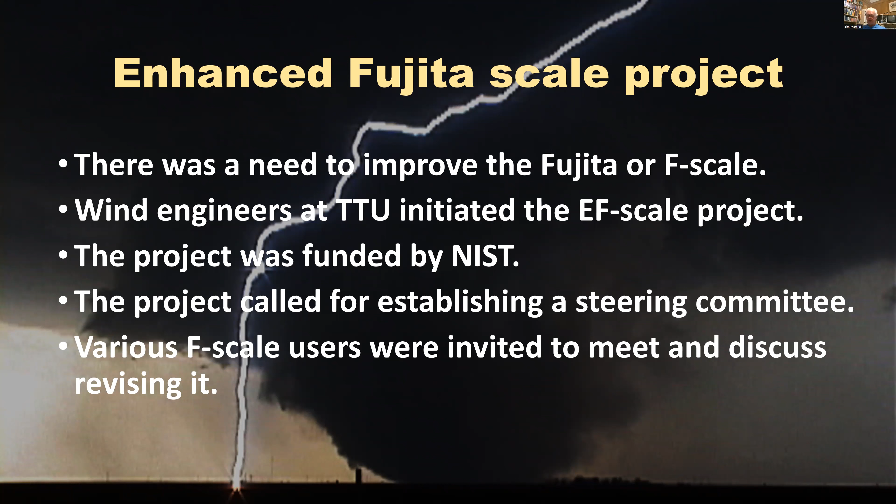The project was funded by NIST, which is still funding it in a way, and it called for establishing a steering committee, and various F scale users were invited to meet and discuss revising it. A meeting was held in 2001. I was there. 20 people attended.

A group developed what I call damage indicators, which are like house, barn, school — that's a damage indicator. And then degrees of damage associated with it: minor damage, major damage, it's gone, kind of thing. The group agreed to preserve the historical database by keeping the enhanced Fujita scale to the 6 numbers, 0 to 5. Then 6 experts were selected out of the 20 to develop the wind speed ranges, and I was one of the 6.

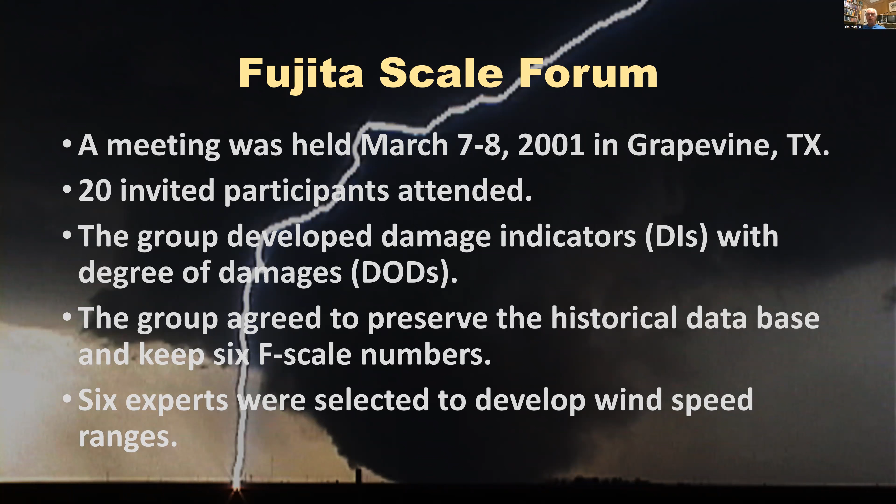So usually what we're talking about in terms of wind speeds, it's a 3-second gust at 10 meters above the ground. And 10 meters is chosen because the standard anemometer height is 10 meters. So we established a range of failure wind speeds through what's called expert elicitation — it's based on our knowledge of buildings, how they are constructed, and how they fail. And then the document was issued.

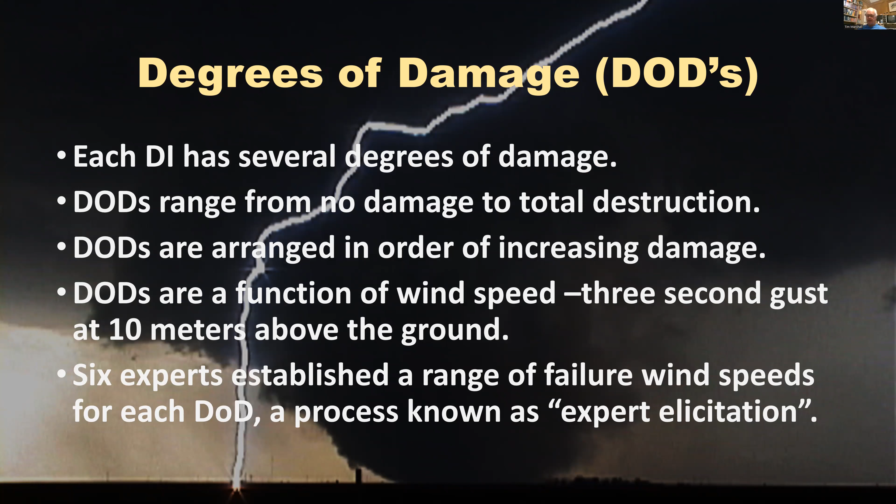So you've seen this if you've Googled that and downloaded this document. The most common DI, of course, is residence. So here we are with the residence. It has a degree of damages from 1 to 10, 10 being the most destructive. We have 3 columns here: EXP, which is the expected wind or failure wind, and LB, which is a lower bound.

If there's some sort of fatal flaw in the building that causes it to collapse. And then we have UB, which is upper bound.

And so you get to choose either column, or somewhere in between if you like, on what you think for this. So if you're missing a few shingles on the roof, it's expected to be about 65 miles an hour. If you're doing more damage than that, with gutters, awnings, vinyl, metal siding, 20% or less of the roof, it's 79 miles an hour.

And if you're dealing with uplift of the roof or a partial uplift, it's 97 miles an hour. We do have 5 in here, which is a house shifts off its foundation, and that's because of so many problems with anchoring that we see, especially in the southeast. And then all the way up to 200, where it means that a well-constructed residence is gone.

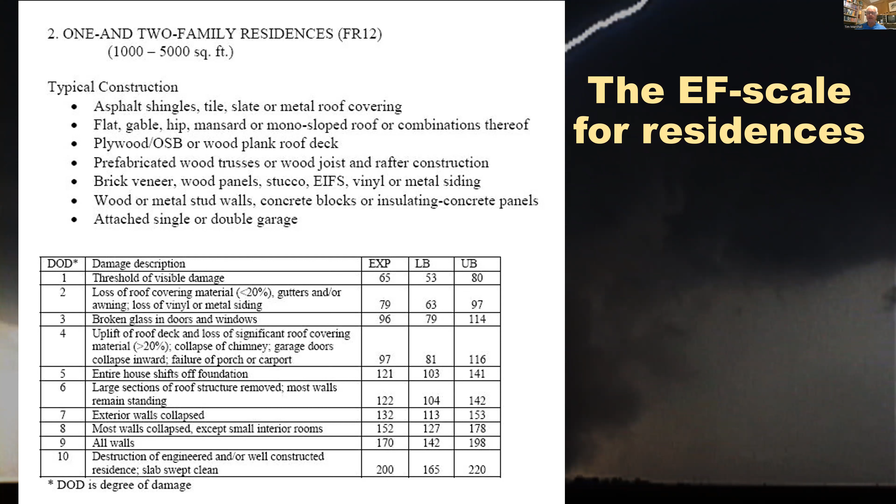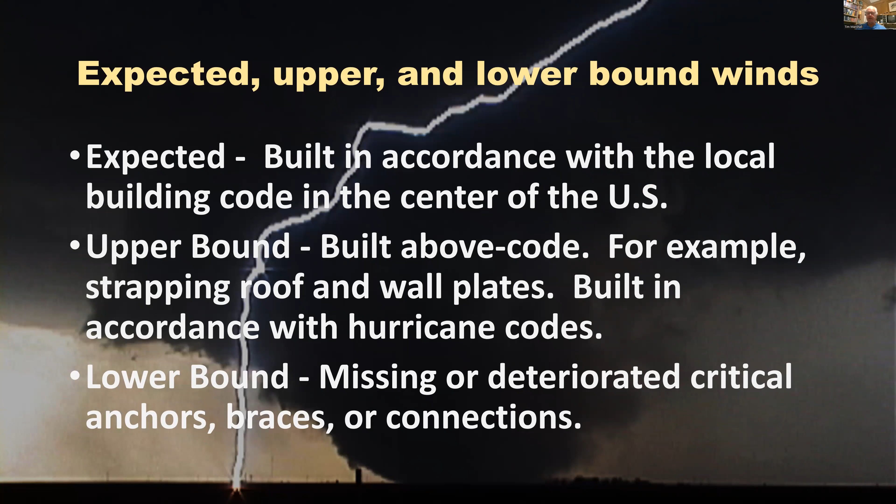So this is just a little bit of an explanation of all 3: expected, upper bound, and lower bound. And then if you want to compare what the old F scale was with this EF scale, you can see that in the lower bounds, not too much of a difference, but in the upper bound, the wind speeds are far less than in the old Fujita scale.

And although they're a little different in terms of their baseline, the Fujita scale was based off of fastest 1/4 mile. This is a 3-second gust speed here for the EF. But you can see the wind speed ranges: F5, 261 to 318, which is a 3-second gust of 262 to 317, so not much of a difference.

But the new scale knocks down the wind speed considerably for EF5. Now why? Well, it's been our experience you don't need a 300-mile-an-hour wind to knock down a house. Houses are built to a minimum code, and you've all taken tests, right?

You've all taken exams. Do you study the night before to get the minimum? Probably not, but you hope to make it and pass. But unfortunately, that's not the way it is in the building community. Their goal is the minimum because of economics.

If you build a house too strong, you're throwing money away. So you want to build just what the code wants. And of course, the odds of getting that, if that's your focal point, you're going to be below that, right?

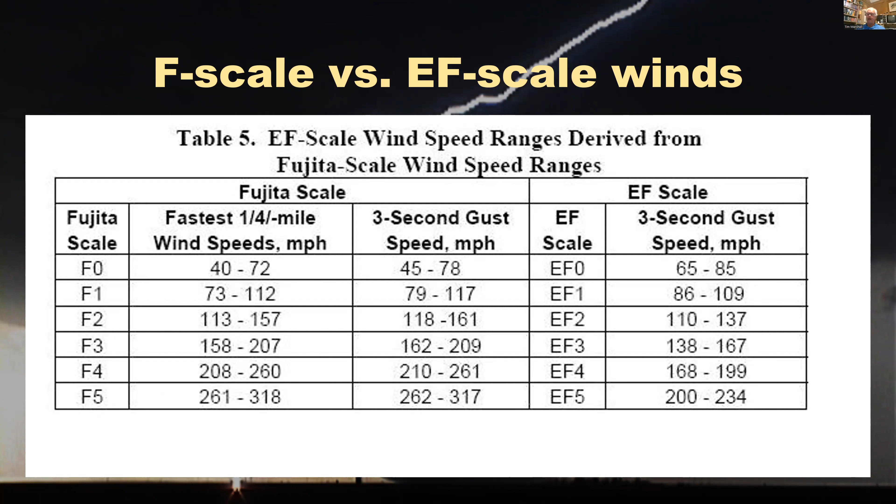But in the building community, it's just not happening. So if their house is geared for 70, that's what they want. But unfortunately, because of workmanship and problems with not understanding connections, their houses fail at a lot lower wind speeds. And even 200 in most instances is way too high for a wind speed to knock down a house. Houses can be knocked down at much lower wind speeds, and we'll go into a little bit of that here in a moment.

So this is a subjective scale, okay? We know that because different people can look at this and go out and evaluate it, and somebody comes up with an EF2, somebody comes up with EF3. There's going to be a difference here. We know that. But we're using the concept of wind speed damage correlation.

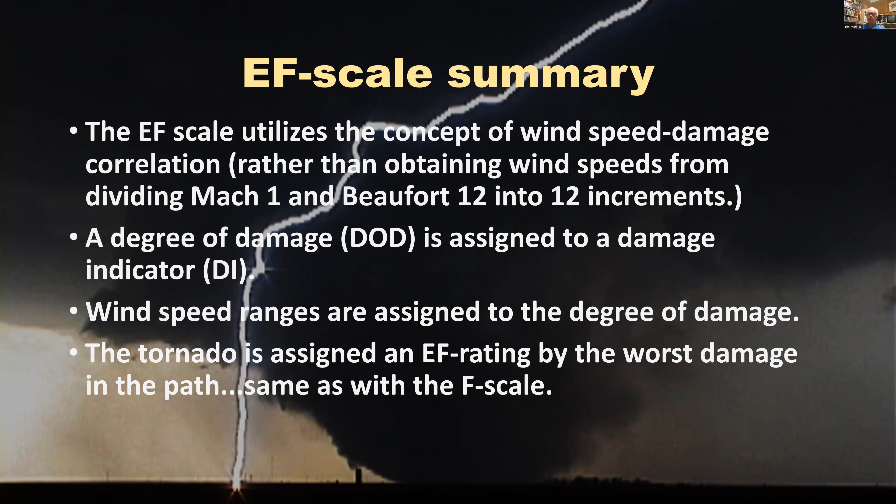And the old F scale was based off of 12 increments between Mach 1 and Beaufort 12. That's how Fujita just connected the line, divided it in 12 for empirical reasons, and there you go. So what we want to do is go out there, look at critical connections, and estimate basically what wind speed it took to knock the building down or do the damage to the building. So it is subjective. Errors can be substantial, especially if people don't know what to recognize. What is a fatal flaw of a building?

And it's certainly going to be much more complicated. The original EF scale document was like 70 to 90 pages. The new EF scale document I'm working on now, that'll be out hopefully in 2025 or 26, will be 500 pages.

Okay, it's going to be huge. And it's going to be complex, and it's going to be up to the National Weather Service to adopt it and then have training materials to train their people on how to evaluate damage, because they're the ones that are going to use this a lot.

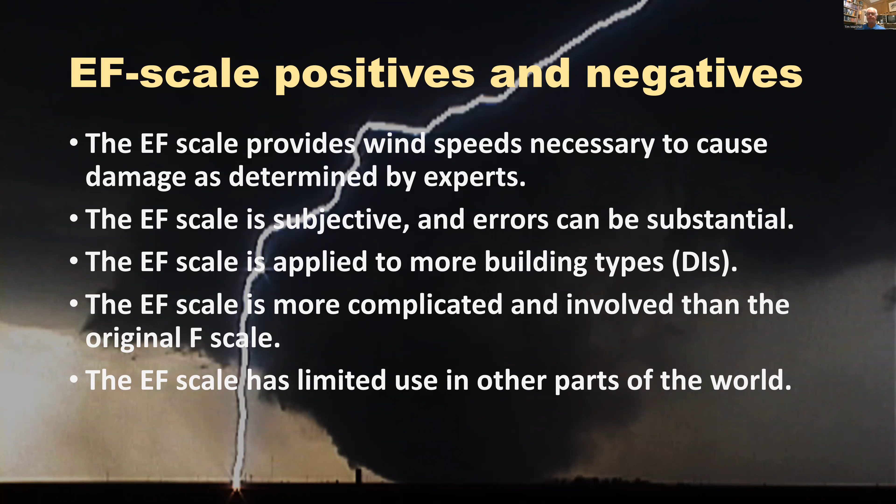So how do we address the fatal flaws? How are we going to recognize that? That's a big key here. And then what happens if a tornado doesn't hit anything? What happens if it's out in the open country?

Well, we are going to add irrigation systems to the new EF scale because we've gotten a lot of research on that. But there's still questions about vegetation and whether the road pavement has been scoured. How do we come up with a wind speed for that? We're not going to be able to do that on this iteration.

In the meantime, other countries haven't waited for us, and they've started to do their own thing. Canada has their own EF scale. So does Japan. In Europe, they have their own F scale. And in the UK, they use a Torro scale. So the international community has gone ahead and come up with their own ways of doing things.

Well, hopefully we can try to work things out so that we can all get together on one page here. And this is a work in progress. We know there's going to be other things that are going to happen in the future. And we're going to have meetings in the future, although I'm going to end my tenure once I am done with this project. It's going to be up to some other person to deal with it. Maybe one of you can take it over.

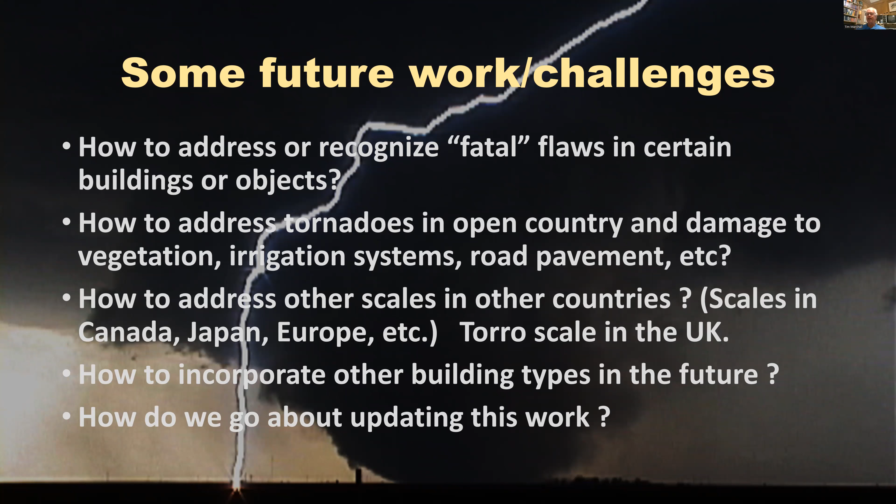It's going to be a job to continue with the EF scale. So in 2015, the ASCE, American Society of Civil Engineers Development Committee, I was asked once again to become part of this. And I said yes.

And I didn't think it was going to be that much. I thought, okay, we do a little bit of tweaking here and we're done. And then mission creep set in, and they asked me to write a commentary, to add photos, to do research on incorporating other damage indicators into the new enhanced Fujita scale, if you will. So that turned out to be a much bigger project.

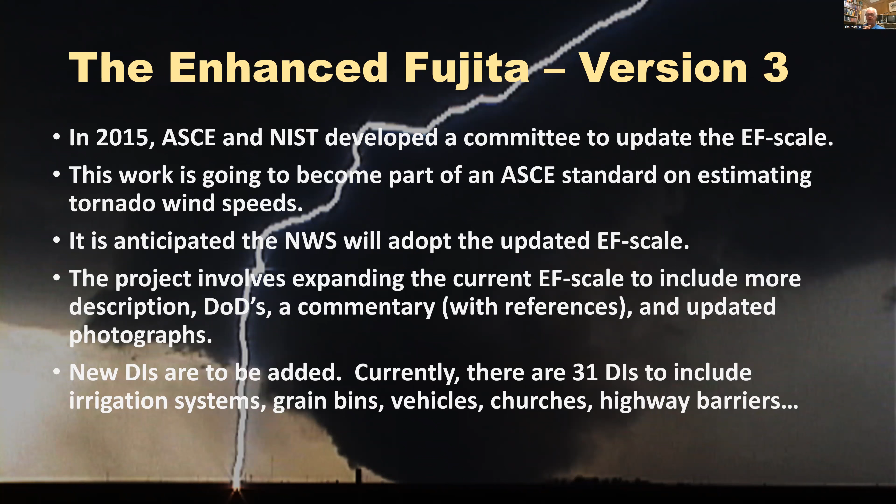Also, we're going to add irrigation systems, grain bins, vehicles, churches, and the like. And the draft, this is as of 2021. Obviously, time is of the essence here, and we're moving along. Years fly by, as you know.

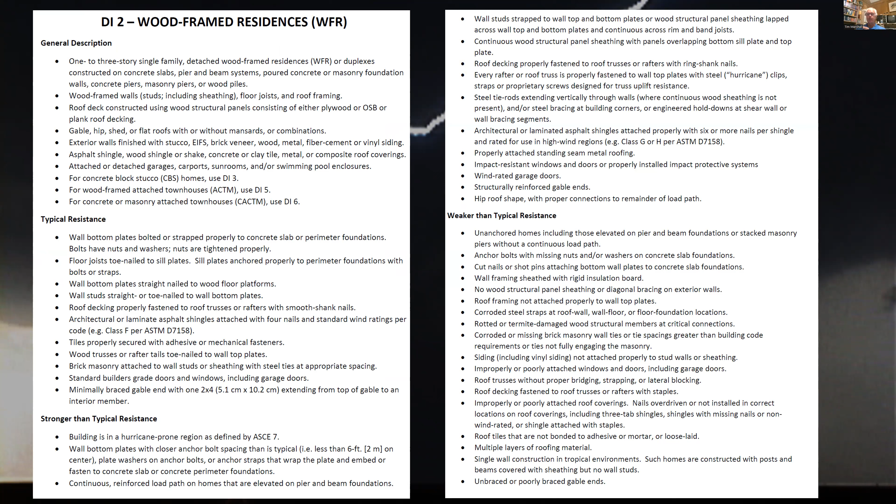But if you compare what the old EF scale, we call it the old EF scale, is with the new one, yeah, we have a lot more bullet points in the new one here. This is for residences. And we have a much more detailed table on how to use this, similar to the old table I showed you a few minutes ago, but here much more detail in it.

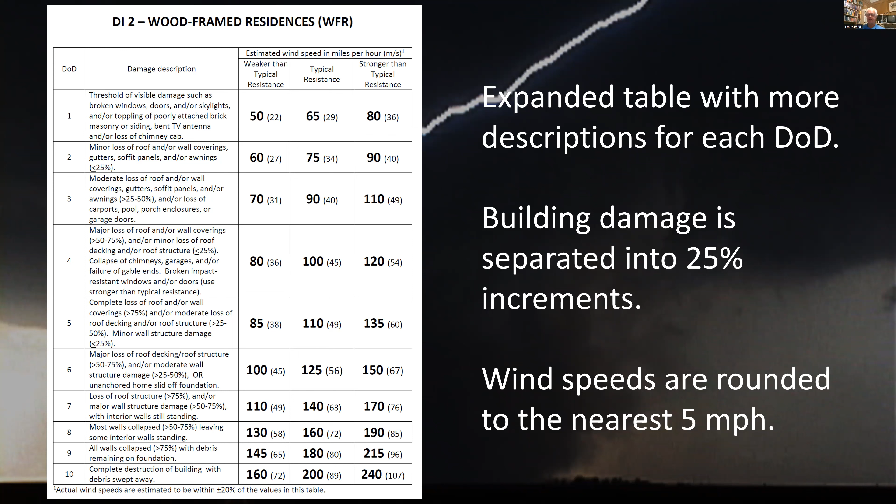The wind speeds are pretty much the same. In this case, we have a lower resistance column on the left, and then the middle one is the expected one. And then the one on the right is higher yet, for the upper bound.

And then there's a commentary, which is brand new. I wrote these commentaries for the most part, and added my photos in there for the damage surveys I've done. I've done over 100 tornado and hurricane damage surveys. So I have thousands and thousands and thousands of photos, and therefore you're going to see a lot of it.

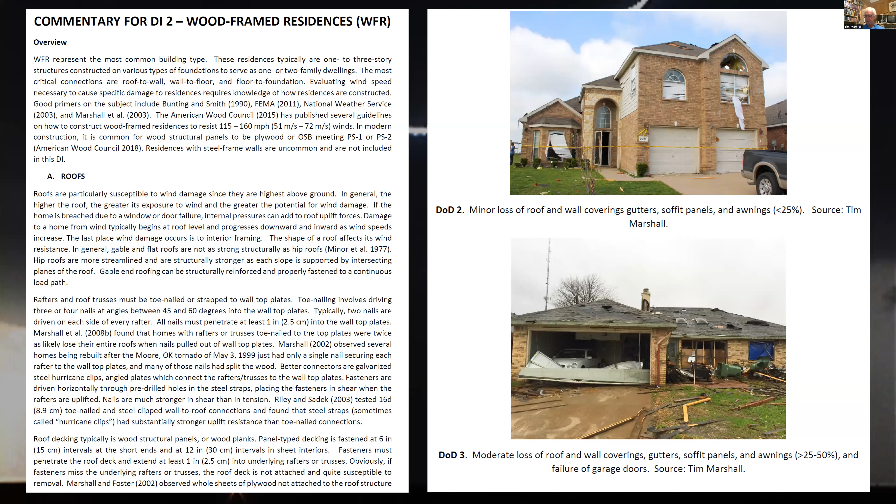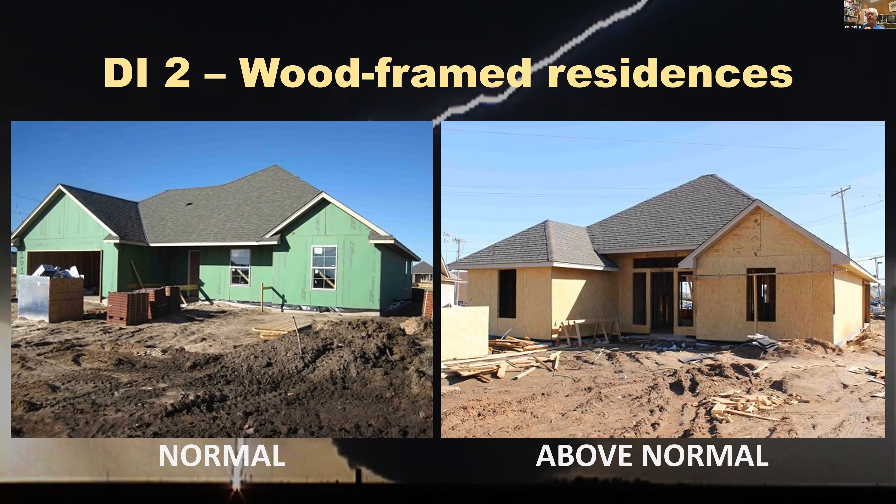Now, you're not going to know that if it's covered up by brick. They'd both look the same, but yet the one on the right would be a stronger house to wind.

Now, what is the code? We talked about the minimum code. In Western Illinois, the code currently is 115 for an ultimate, which is about a 90 mile per hour, 3-second gust. Well, 90 miles an hour doesn't sound like a whole lot, and it isn't. Some derechos have higher winds than that. 90 isn't really a very strong tornado, it's a fairly weak tornado. And 90 for a hurricane is a pretty low-end hurricane.

So that's the minimum, that's the code, that's what builders are going for. And obviously, if they're going to go for that as a target, they're going to miss it more often than not. So homes aren't going to be built very well. We know that.

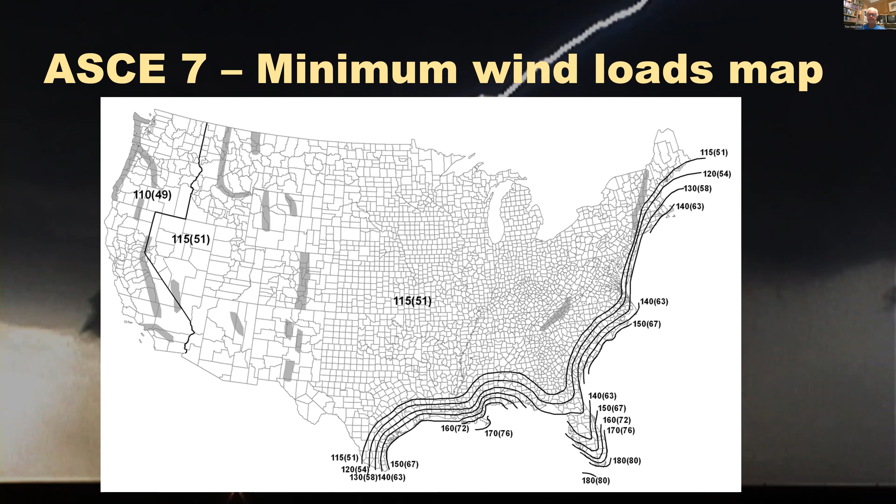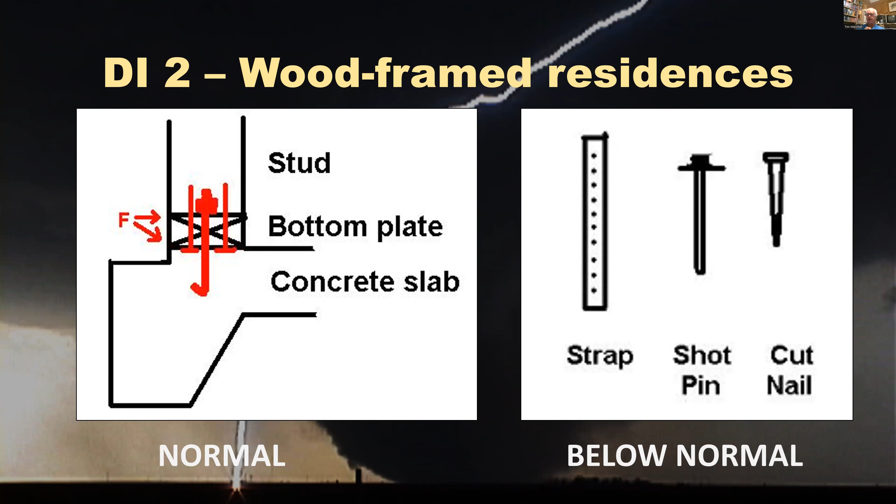And some municipalities allow a shot pin, where you just load a special gun and you go ahead and shoot, boom, down right through. Well, it's like a nail going through it, spalls off the concrete, doesn't really seat very well. But unfortunately, that's what's done.

So here we have on the left a normal connection, which is a stud that's toed to the bottom plate, with a shot pin and a square washer attaching it down to the concrete foundation. But on the right, we have an above-normal connection, which involves an actual steel tie that grabs the stud, and the fasteners are driven in horizontally so that now you're dealing with trying to shear the fastener instead of just pulling it out. Much stronger connection, see? Connections in shear are much stronger than a connection in tension.

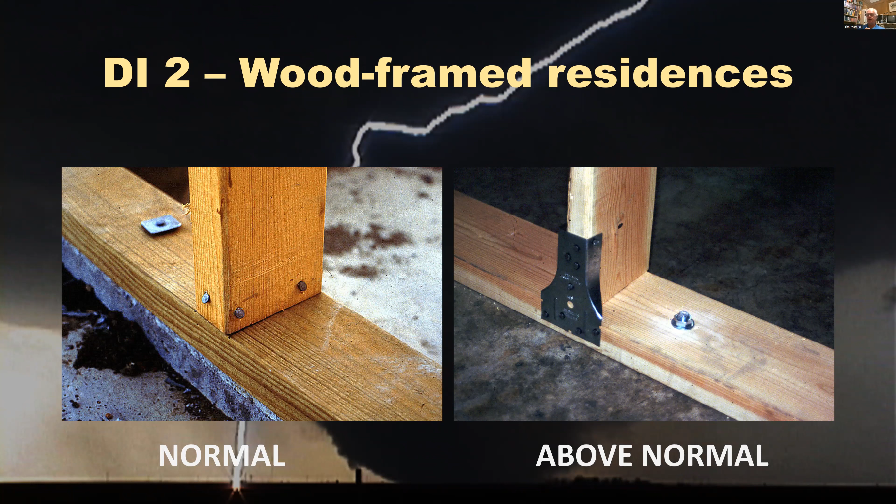And the same goes for the roof. Here on the left, a typical toe-nailed rafter into the wall top plate, and the top plate's doubled for the weight of the roof. But on the right, you've heard of the hurricane strap, metal straps that can be done, and again these are horizontal and screwed in. Screws are stronger than nails. You're trying to shear this connection, tear that plate, or pull out those fasteners from a shearing perspective, and it's a much, much stronger connection.

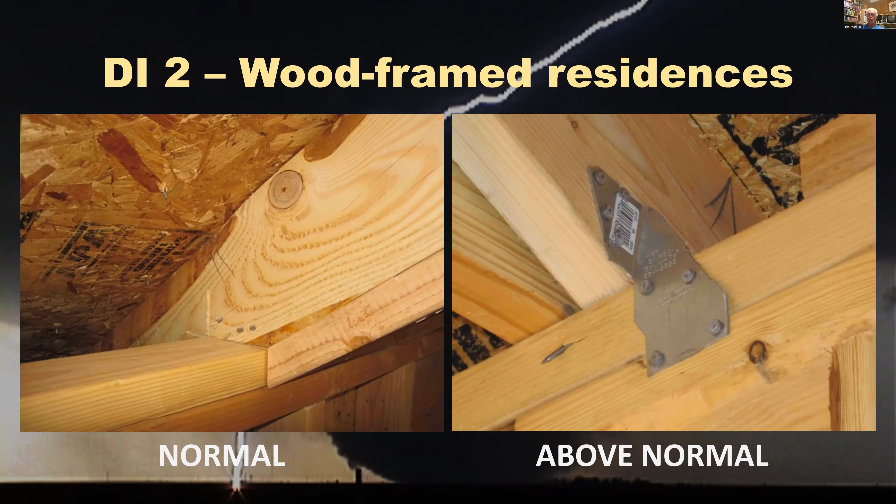So when you get to a house like this, trying to evaluate it using the old EF scale, we see that the roof is gone for the most part. If you scroll down, it says DOD 4: uplift of roof deck, loss of significant roof covering material greater than 20%. Collapse of the chimney—well, the chimney's still good, but that's okay. Garage doors—you can't see the garage here, but that's pretty close. It could be 4 or it could be 6. Large section of the roof structure removed, most walls remain standing. So maybe somewhere between 4 and 6 for an expected value.

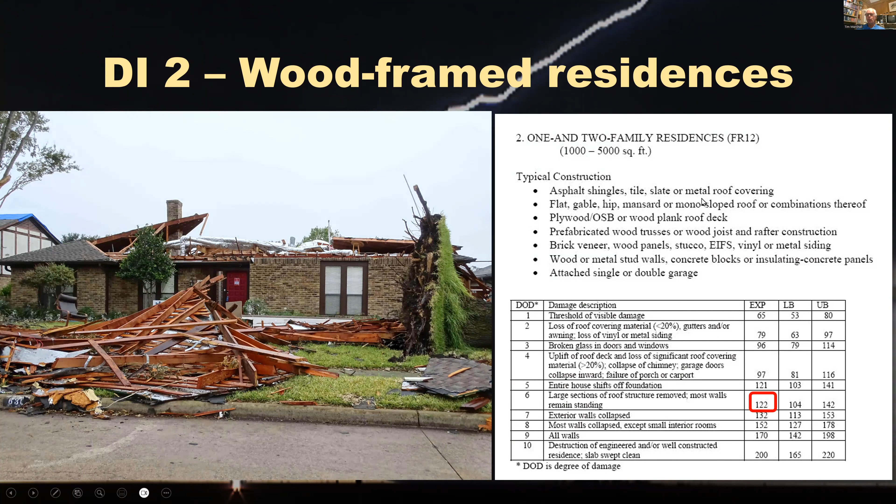And that's what we do. We go ahead and use that, somewhere between 4 and 6.

The next one here, we have much more severe damage—the house is completely collapsed. There's hardly a wall left standing, but we've noticed at the edge of the house that it was actually nailed. The wall plates were nailed in the low insets on the lower left and lower right. You see the little divot—if you've ever pulled up carpet from a floor, sometimes you have these little divots, and that's what this is here on the right, a divot in the concrete, just a clear cover coming off. Well, this is horrible construction. I don't know how anything like this passes in the city, but it does.

So in this case, where you'd have all walls down, number 9, you'd have to use a lower bound here, or the LB—that's the value you would use. It's not a well-built house. So recognizing the fatal flaw in a house could actually reduce its wind resistance, and that's what it does here. You can look around—there's trees around, there's other houses around. This house looked like it just got picked on. It just didn't take a lot of wind to knock this house down. And that's the problem with some of the old assessments, that they don't consider the construction. You have to look at the construction.

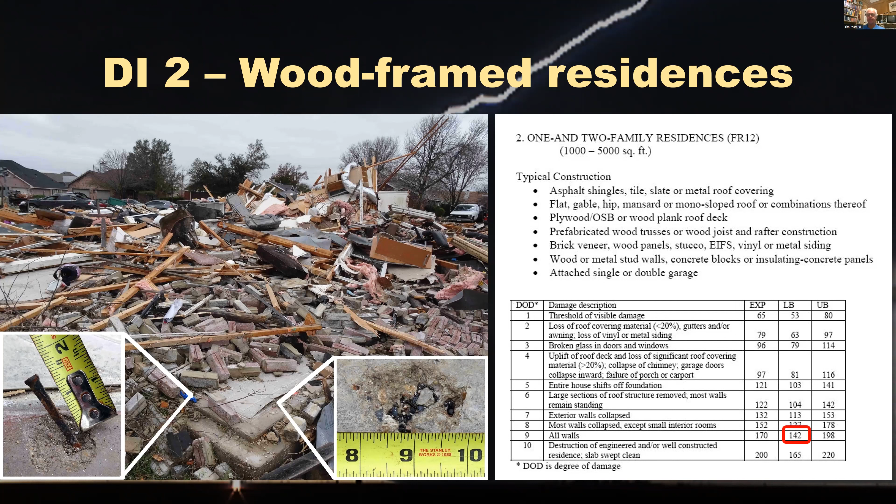And here's another slider here. Was this house anchored down? No, it was not anchored down. Look at the blocks it was set on. Now, unfortunately, there's a lot of houses in Illinois that are just sitting on blocks like this, and they're not anchored at all, so they will just slide right off. And that's why we have DOD 5 in here, entire house shifts off foundation, because that's for so many houses that we see. Sometimes a third of the houses we see are what we call sliders.

Now, I'm from Chicago. I used to eat White Castle hamburgers all the time. We used to call them sliders, but it's the same thing for houses here, without the onion, of course.

And so now you have this as being a real problem. Substandard construction is what this is. You see the roof is gone, so that could give you another point. You can say, okay, the roof is gone, so how was that attached, if at all?

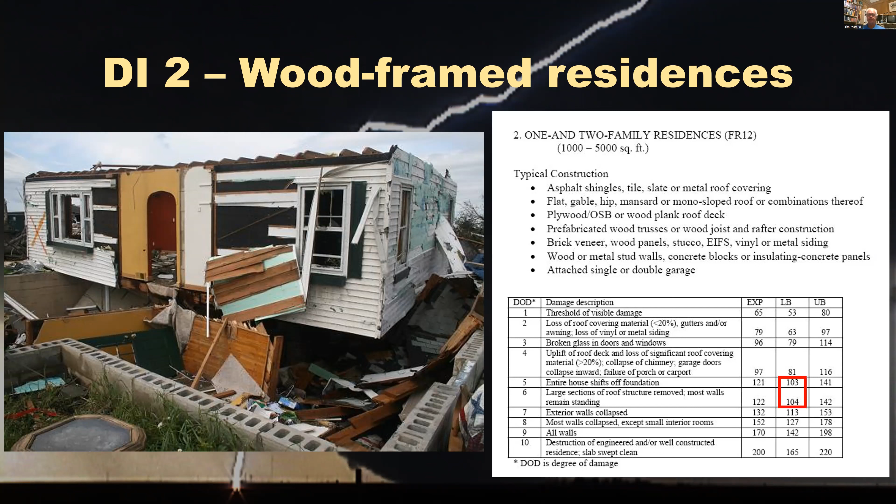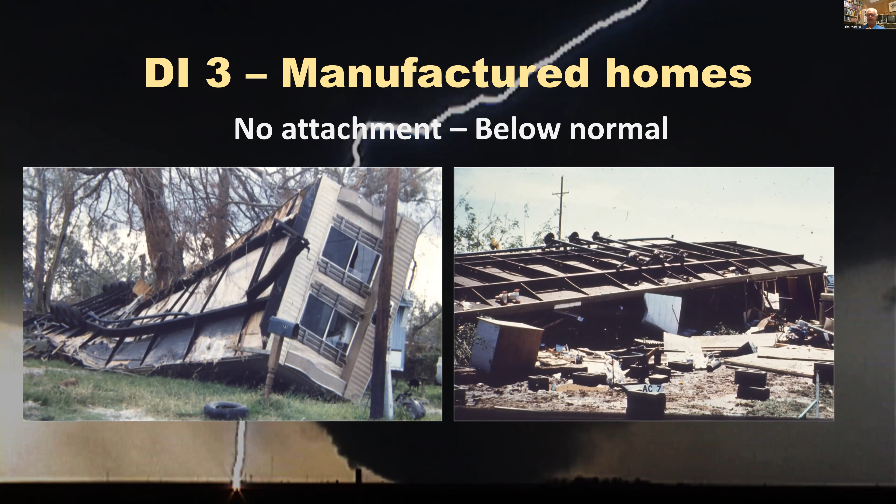And then manufactured homes—these are steel carriages or undercarriages that are really supporting a wood box. They are minimally anchored or sometimes not anchored at all. You've heard a lot about how these things roll and tumble at fairly low wind speeds. The one on the left, look at the mailbox—it's still there. The one on the right flipped over. The wheels had been removed prior to when they installed it, and then they're just sitting on blocks, that's all it was.

But again, where do we get the most of our tornadoes? Where do we get the most of the derechos? We get them here in the center of the country. They do have higher requirements in terms of anchoring for the coast because of hurricanes. So that's interesting, because somehow tornadoes and derechos are not a threat, but yet hurricanes are. That doesn't make any sense.

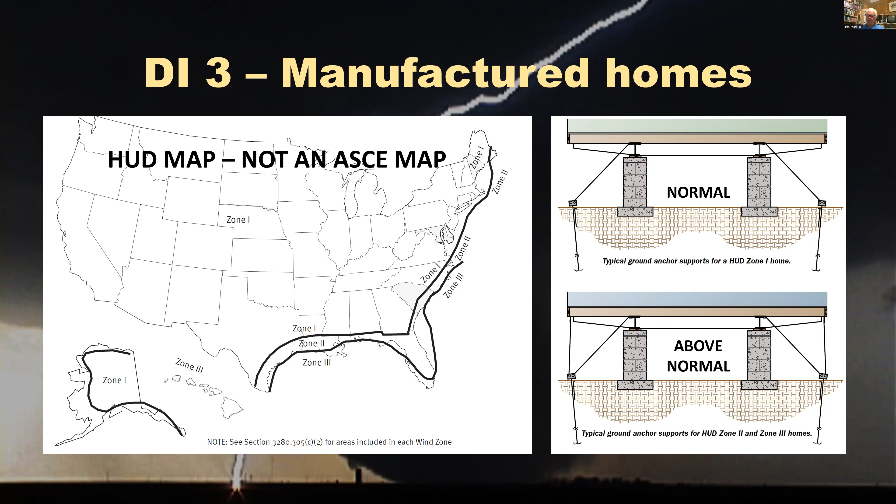But from a standpoint of what they think about in the code, it's like, well, the odds of getting hit with a tornado or a derecho are pretty small compared to getting hit with a hurricane. Well, that may be true, but if you're the person that got hit, you certainly would want something more than minimal attachments.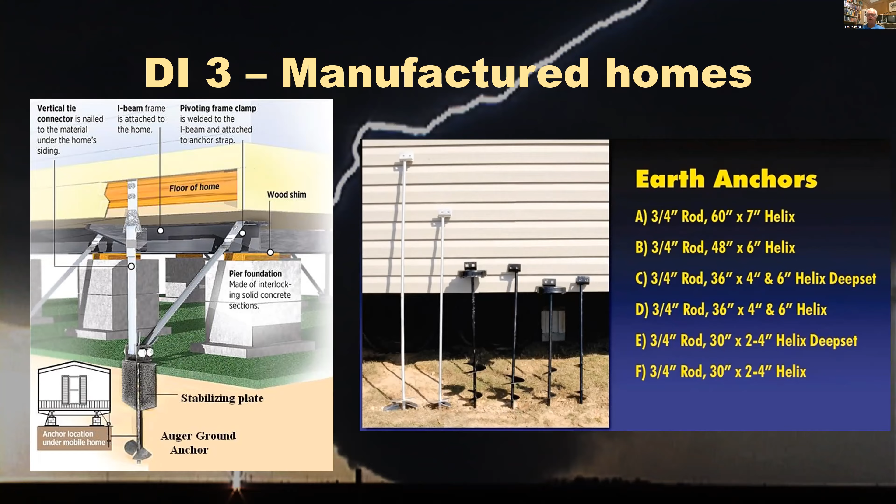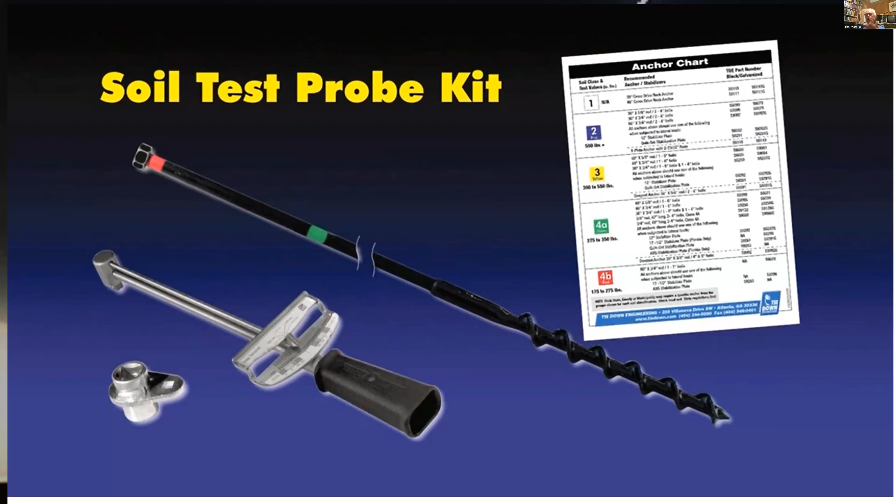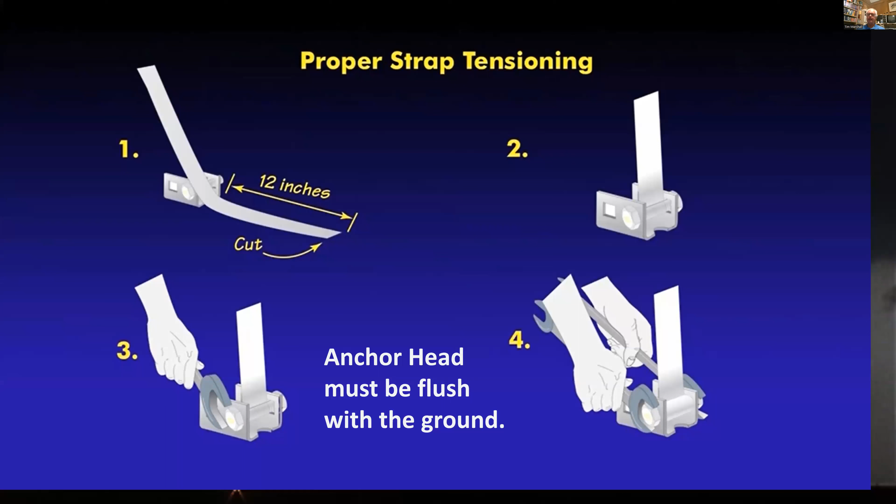Well, then you got to use a rock anchor, and it's a totally different anchor than it is for soil. It shows here how you're supposed to install the anchor. It goes down, you have a plate, so it bears up against the plate like so. And then you got to test for soil conditions, depending on how long your anchor is, in type 1, 2, 3, 4A or 4B soils. It shows you here how to attach and make that strap tight, and the buckle that goes around the I-beam underneath the home to make sure that's also attached.

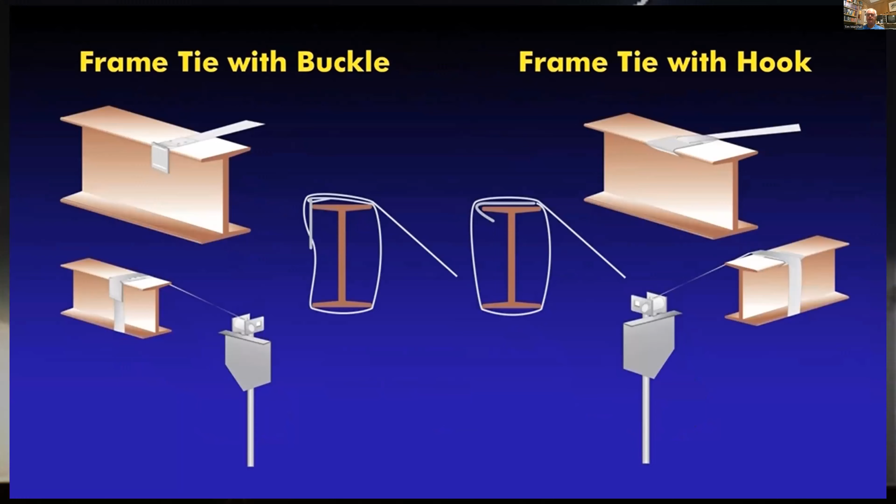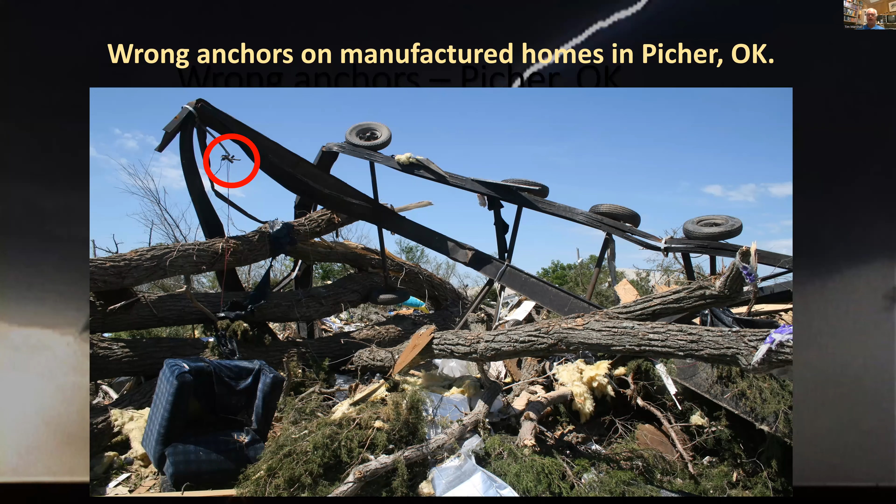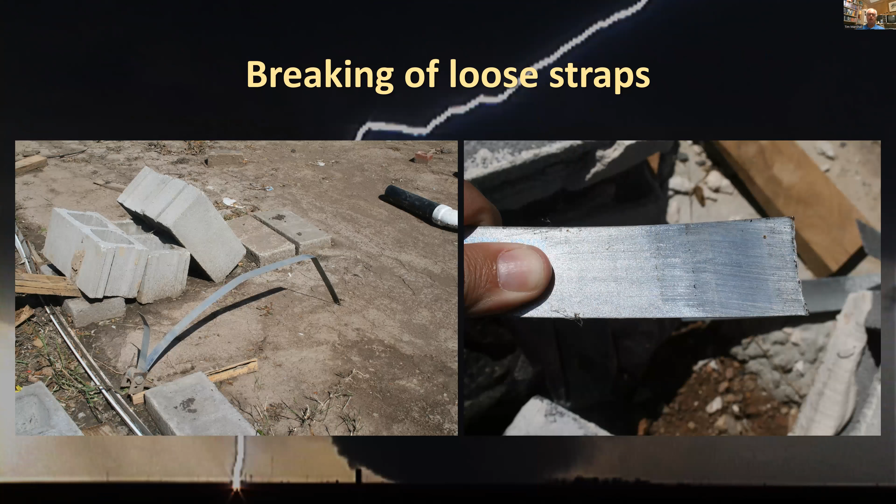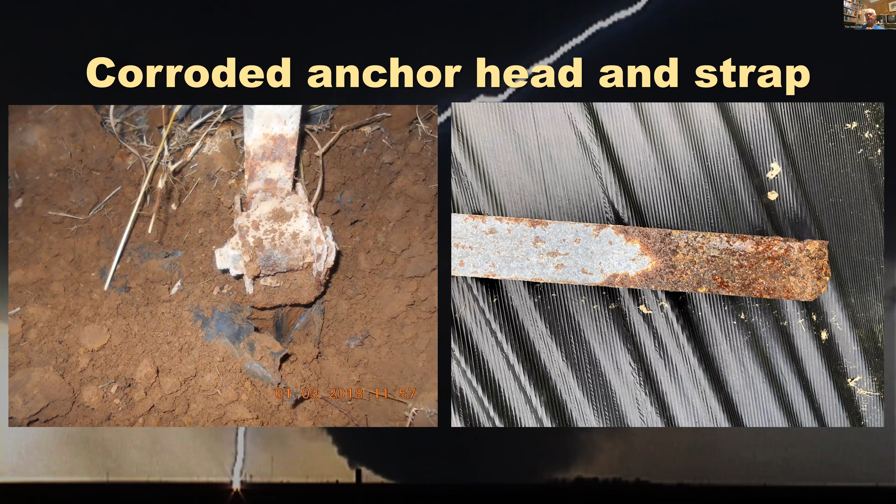And of course, it pulled right out. It didn't really anchor this home. One of the things that happens is when part of the house begins to come apart, the strap breaks. It's a real flimsy strap, and we can see that here. It's galvanized steel, but that doesn't mean it's not going to rust, and it typically will rust and eventually corrode away. I looked at a number of these in Florida, and they corrode away in 10 to 20 years.

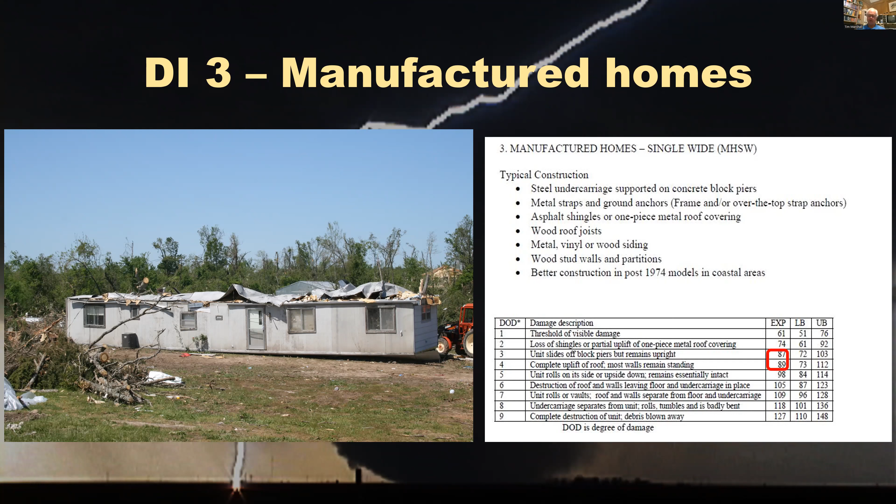So going back to the EF scale, looking at this, we see that this manufactured home has a steel undercarriage, but it's not on blocks. Well, it fell off the blocks. It also has some roof damage. So if you look down the degree of damage, you've got the unit slides off block piers but remains upright - that's DOD 3. DOD 4 is complete uplift of the roof, most walls remain standing. Well, it's been uplifted some, but not complete, so somewhere between 3 and 4 DOD. This is normal expected construction, what you would expect to be a failure wind speed there. So that's how we would apply the EF scale to manufactured homes.

Now, if you go out to one of these big box buildings like a Walmart, Kmart, Home Depot, Menards, whatever, a lot of times they're built of either concrete masonry units or a precast tilt-up wall. Tornadoes hit those and damage those pretty well, and we have to have a different DI for that because it's a totally different kind of building.

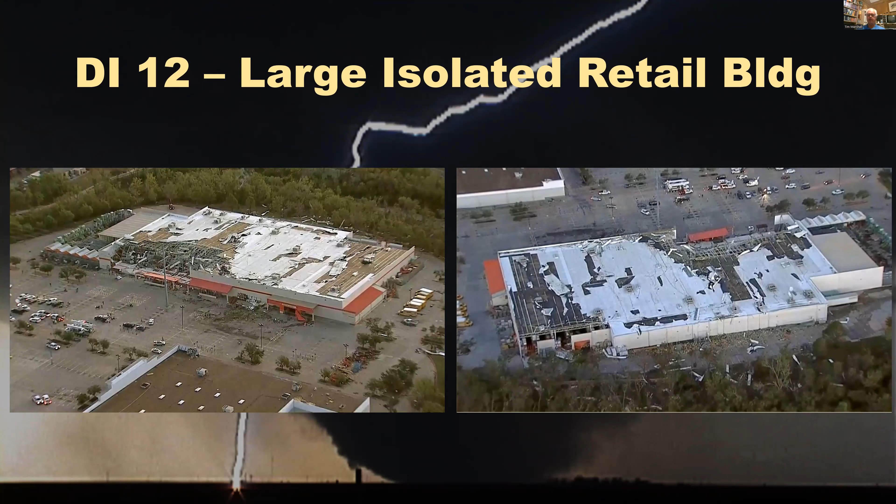And you can see the types of damages here. This was from Dallas, Texas. I looked at this Home Depot here. It had a few wall panels down. The front end of it buckled in where they had a weaker wall. You can see pretty extensive damage here. Here's a ground view of it.

Interestingly, things that are not damaged are just as important as things that are. Here we have a high tension line tower that wasn't damaged, but the building is damaged. So that's interesting.

Large isolated retail buildings, that's what we call it. If you look at the degree of damage, you can see uplift of some roof decking, significant loss of roofing material, long roof spans collapsing downward, uplift and removal of roof structure. We don't indicate percentages here, but we will in the new enhanced Fujita scale. So somewhere between expected wind speeds of 103, which is DOD 3, and DOD 5, which is 134. But we also know these towers for electrical transmission are designed for 120, so we figure that stayed, it's probably a little less than 120, somewhere between 103 and 120.

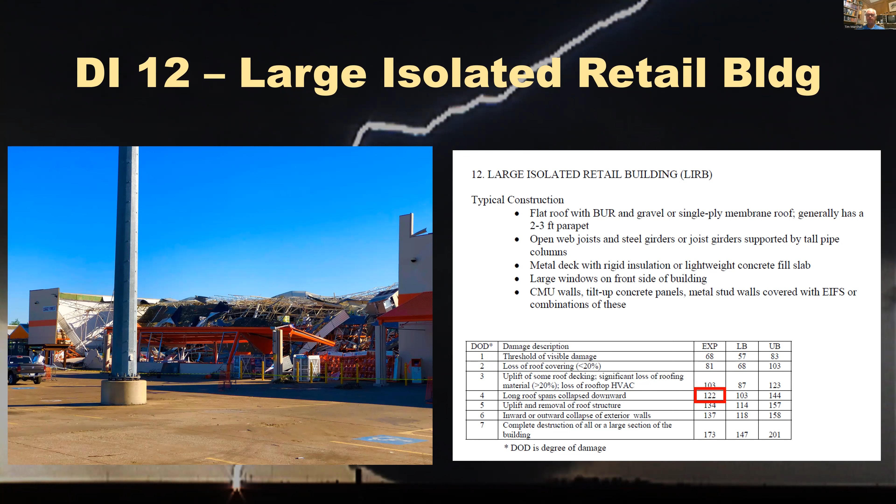Now we're looking at a large isolated retail building in Joplin, Missouri. This was complete collapse except for one little corner where people were seeking shelter from the tornado. The whole roof structure is gone, and unfortunately there were several fatalities because a lot of people didn't get to shelter in time. So this is complete destruction of all or a large section of the building.

That's true - inward or outward collapse of exterior walls is also true. But we decided it was up there probably in the 173 range due to the extent of the destruction, where the wall panels are say 85% down and the entire roof structure is gone. It was actually deposited in a field next door.

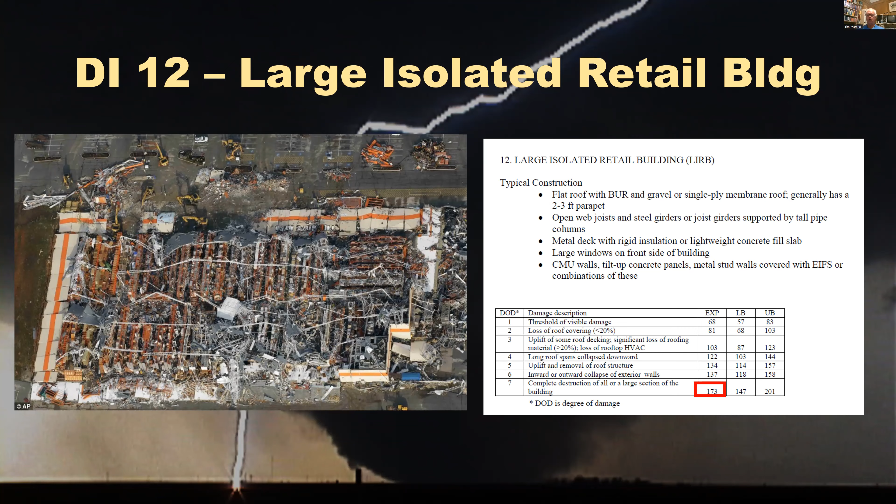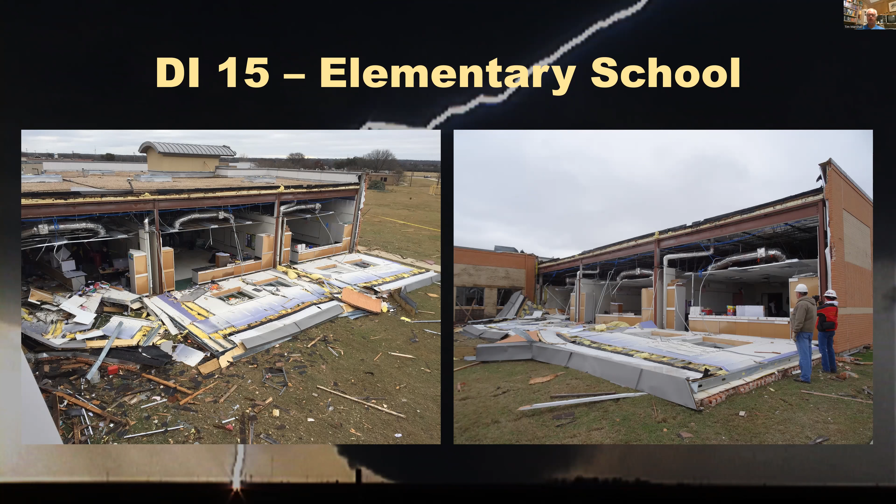This is a school I looked at in Dallas, Texas. It was in an area that didn't have a whole lot of damage, and I'm wondering what went on here. This is an exterior wall that fell out. What happened was wind got in on the other side from a broken window and then pressurized the building, and the wall fell out. So I'm really curious about the attachment, if any.

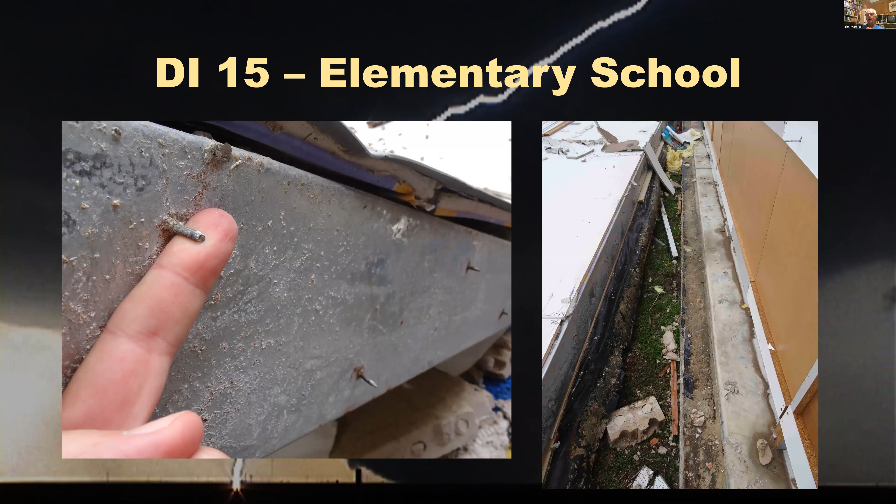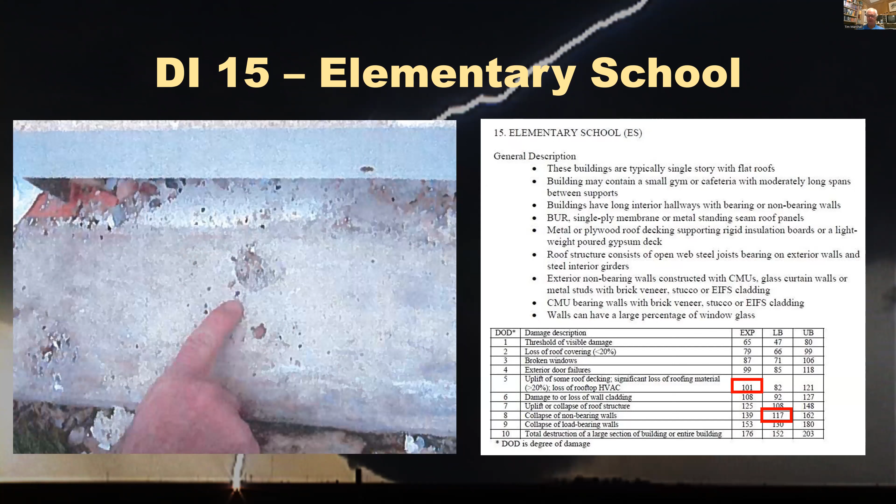Well, the base of the wall was a steel channel stud, and it was nailed into the slab, not bolted. You can see on the right the little divots there in the concrete. Horrible construction - how did this get through a building inspector? This is in the Dallas area, and it's just amazing how that happened. There's the divot there. Because of this fatal flaw in the wall, we decided that it was still fairly low wind speed, DOD 5.

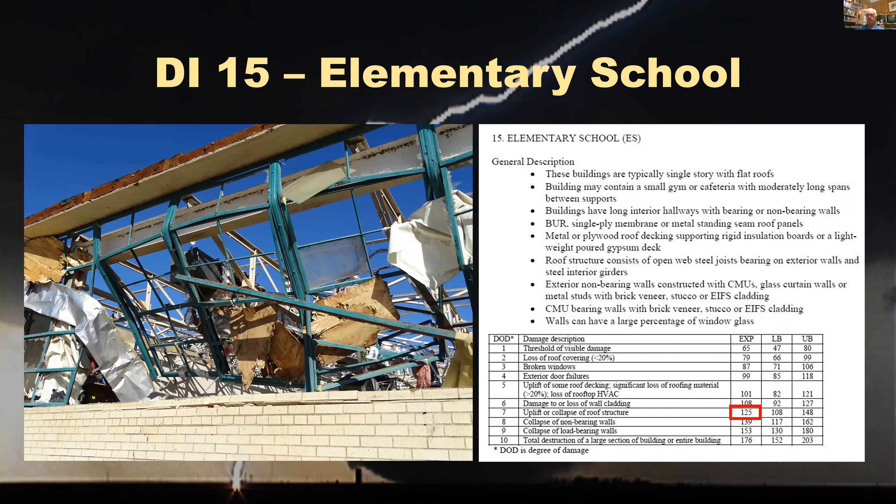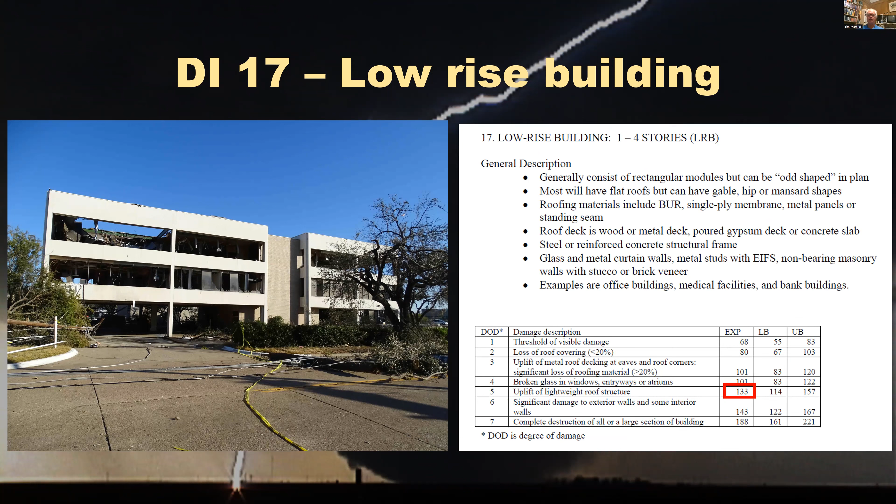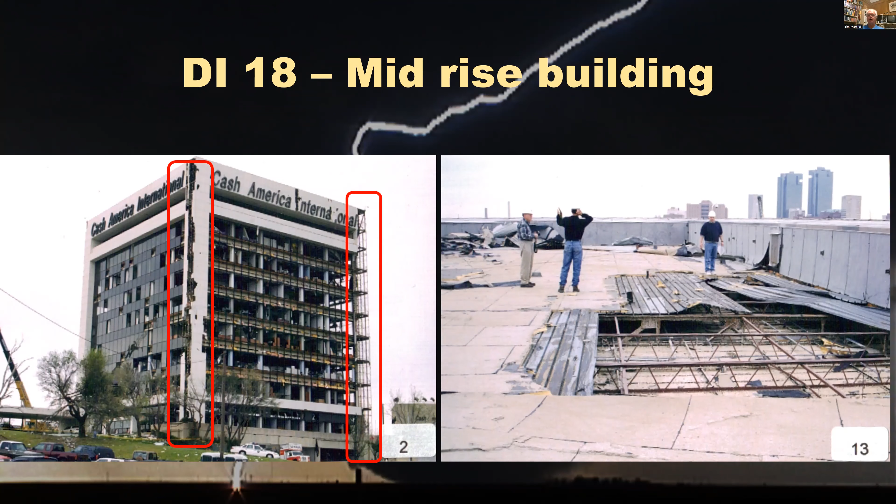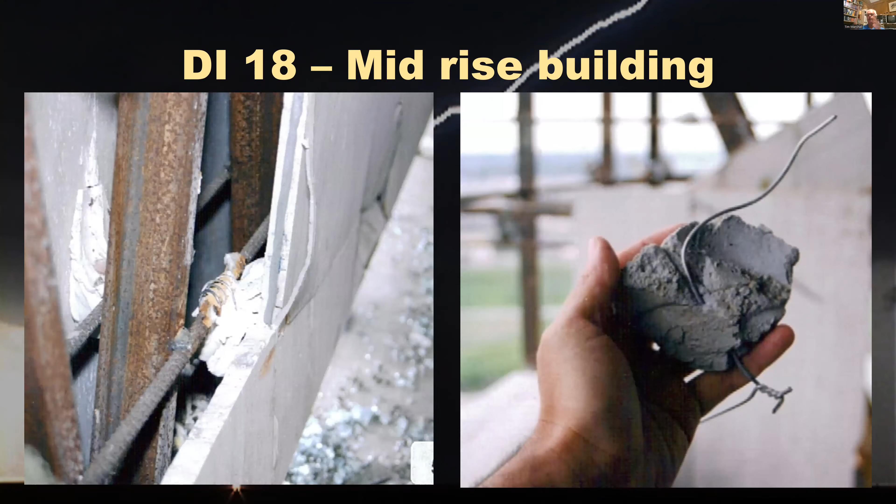When looking at this, I found out the travertine was held on with little twisty tie wire onto rebar - that's what this is showing you. Remember all the twisty ties you use for bread and things? Well, they used it, unfortunately, for attaching stone to the building.

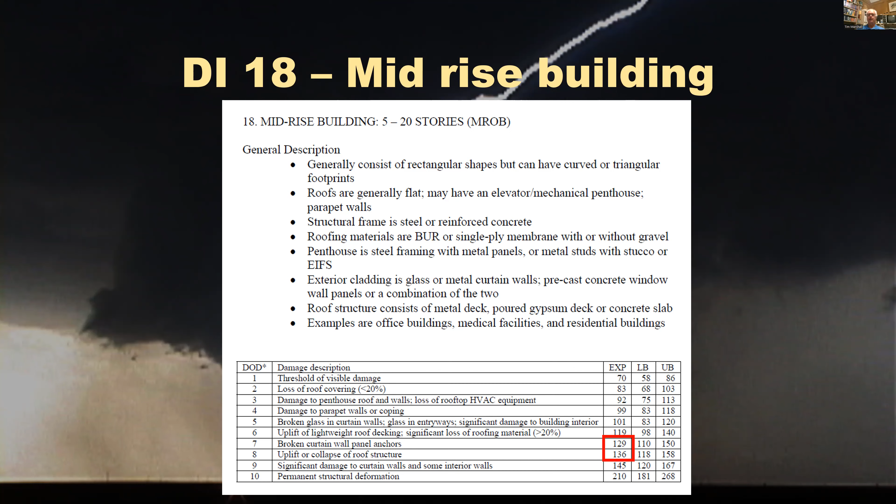Looking at the mid-rise buildings that are damaged, we've seen them, 129 to 136 is the failure there. And yes, some of the big boys, these are high rises that have been damaged by tornadoes. They're not immune, but the nice thing about a high rise is that they're engineered so that the frame stays.

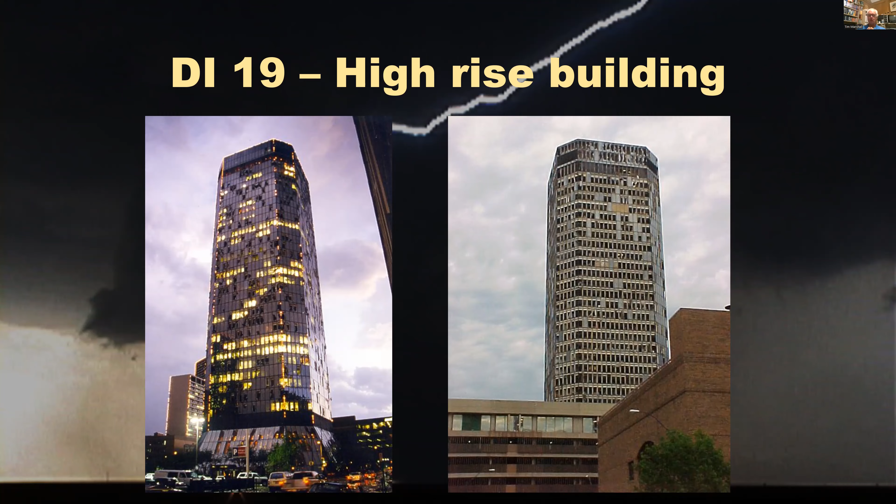Well, the cladding, which is just a window dressing around the perimeter, an array of windows, well, windows break. Usually it's because there's debris flying around that breaks windows, believe it or not. Rocks break glass. So we look at this and see, for high rises greater than 20 stories, as this was,

what DOD and wind speed are we going to be assigning here? And we went ahead with broken glass in entryways, 101, significant damage here to the perimeter.

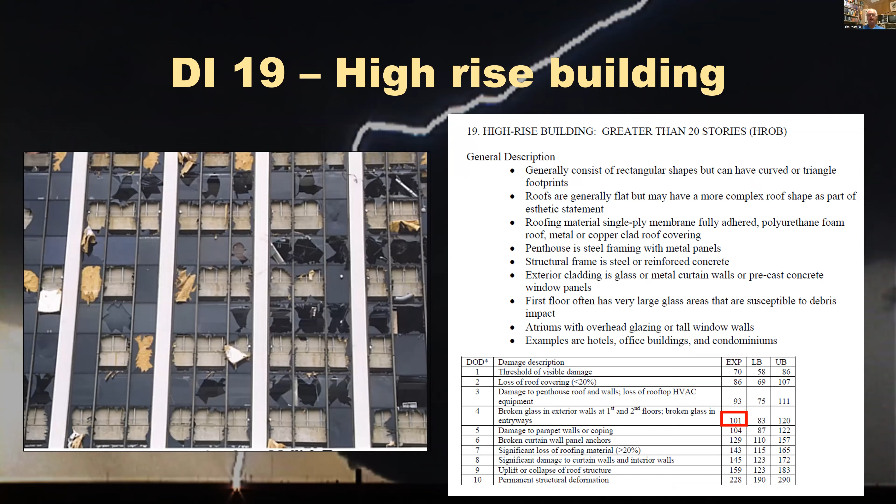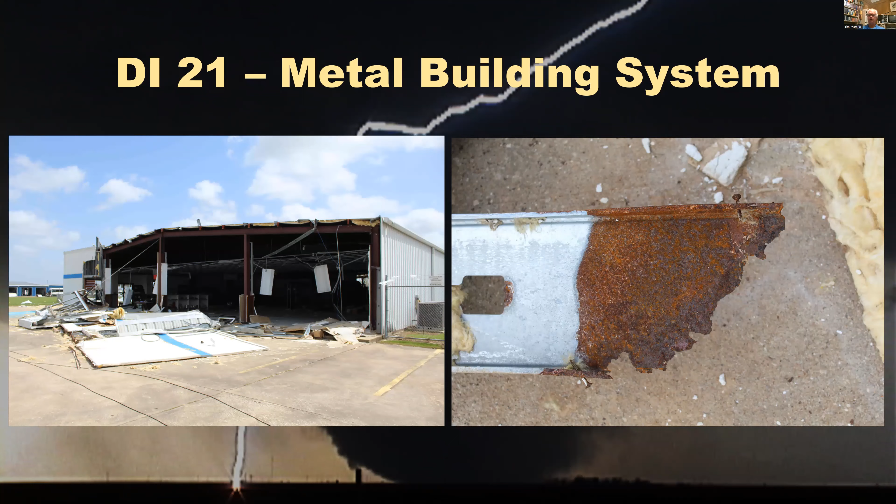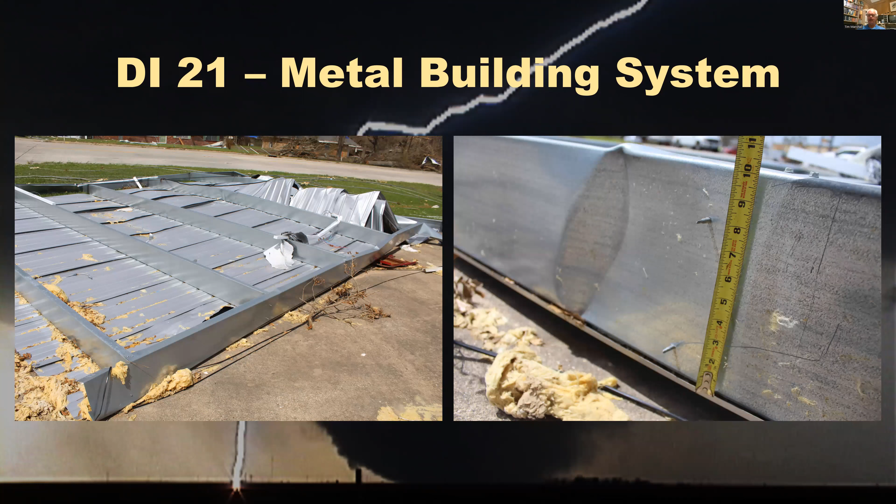Once again, looking at those fatal flaw connections, on the left is the wall laying in the parking lot. On the right are little tiny nails that are driven into the slab. That was it. That's all you got into the slab. So not very good there. They're looking at a really poor application here.

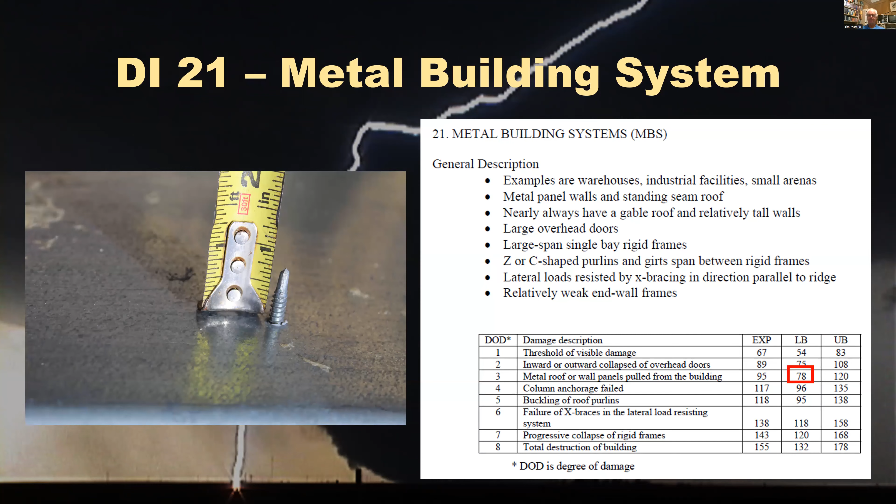Now, we have a lot of non-DIs currently. We're working on this to try to add some of these, but it's difficult because vehicles come in various sizes and shapes and weights, and it makes a real difference which angle of attack of the wind. We've seen videos of vehicles being thrown up in the air, and it's like, what kind of wind speeds do these, and does this damage? So it's like, we're working on it.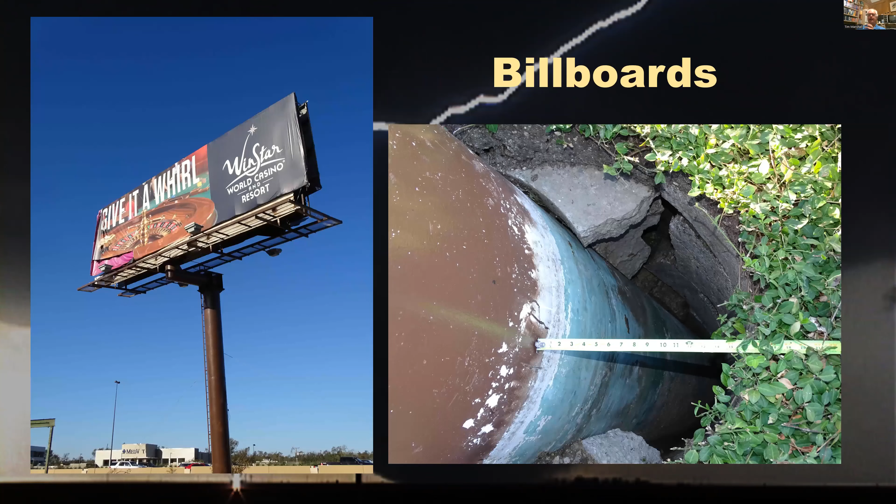And then sometimes we come across some funny things. There's a casino nearby called WinStar, and their slogan is 'Give it a whirl.' And you know what? The tornado did that. It gave it a whirl. It twisted this thing about 45 degrees and moved it about 16 inches off its base. So, be careful what you wish for.

So, we don't have billboards in the EF scale, although we do find funny things every once in a while. We think, gosh, how are we going to rate that? Well, fortunately, there's other things around it that we could rate, that were buildings there.

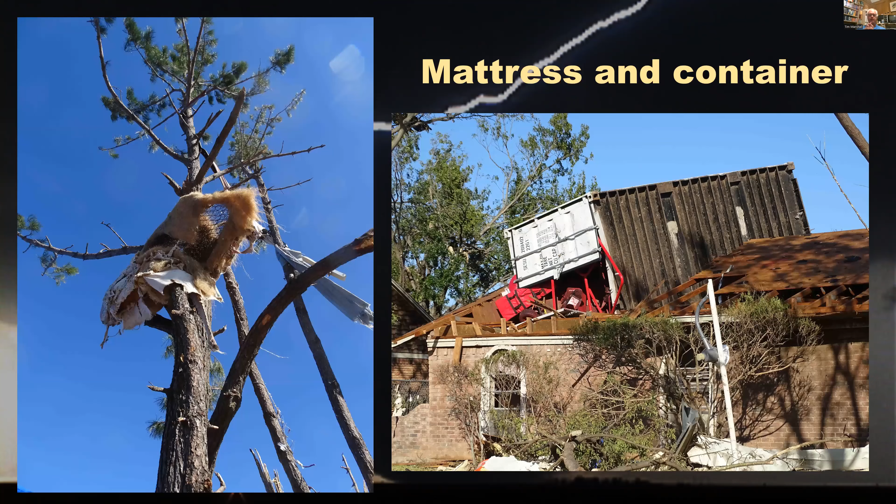And some unusual things, the mattress in the tree. Yeah, you've heard about that. Yeah, I've seen plenty of those. Mattresses like to cling on to trees.

And then on the right, some unusual one. This was a box car storage unit that was full of desks from the school, and it was lofted up and deposited on somebody's roof. So imagine what it would take to lift that and loft that. You could probably do a calculation of that to indicate what it would take to lift this thing up. But that's pretty amazing stuff that we've seen out there.

So anyways, this kind of gives you a little bit of a run through about the enhanced Fujita scale, what we're working on, still a work in progress. That shows you how we use it, the National Weather Service folks, how they use it.

They take their job very seriously. When they go out and a tornado happens, they map it out. They're interested in knowing the path length, the path width, and the overall intensity of the tornado. And that's what their job is.

And they have what's called a damage assessment toolkit, which is available online. You can look at it. It's a wonderful history. And the neat thing about the damage assessment toolkit is not only do they pinpoint areas of the DIs and their degree of damage, but they actually have pictures in there that you can see what they're looking at. So it's a great training tool too.